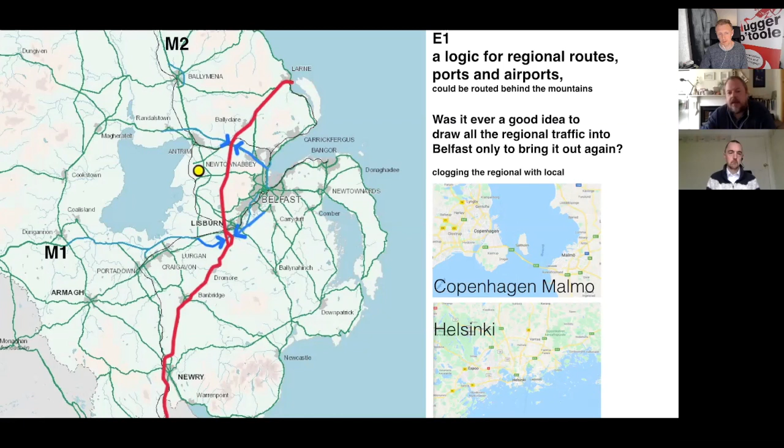The idea is that you could connect past Sandyknowes or even further up, you could connect the motorways from the M2 coming from the north in Ballymena and Randallstown down through the back of the mountains and take that traffic where it wants to go, to either the M1 or down the A1, Dublin and the ports in the south. So Belfast would be slightly bypassed, and this would actually bring it in line with the way that Helsinki and Malmo organise their very large road infrastructures on the edge of the city and away from people, but strategically connecting ports and airports.

So I suppose back in the 60s, they didn't realise that the airport might be so important as it became. And of course, airports now might not be so important anymore. But another strategic problem we've had in Belfast is because we had an airport that was a bit peripheral and wasn't very well connected, it laid the ground for Belfast City Airport to come up. So now we have two airports, and of course Dublin became a bigger airport. So we've divided our energies in Belfast between two airports, and I think that partly is connected to how we thought about the roads.

The other thing I'd point out about this diagram is that we could still do this. I'm not sure there's the appetite to build so many roads anymore, but we could do the Hill-Hall connection from the outer ring in the south and east. That would tend to draw some of the traffic better into Lisburn and the motorway network, paralleling the M1 as it comes out of South and West Belfast. And of course that road would take some of the traffic that wants to get from Larne and the M2 off down to Lisburn, so the M1 cross country wouldn't take it into Belfast.

So I think that would have been my ideal wider solution in the 60s, to say that we would connect into the port and city of Belfast with a series of feeder roads, and they wouldn't cut through the city so much as feed into it and disperse into it. That's how a lot of European cities worked, because they didn't want to demolish their whole city centre.

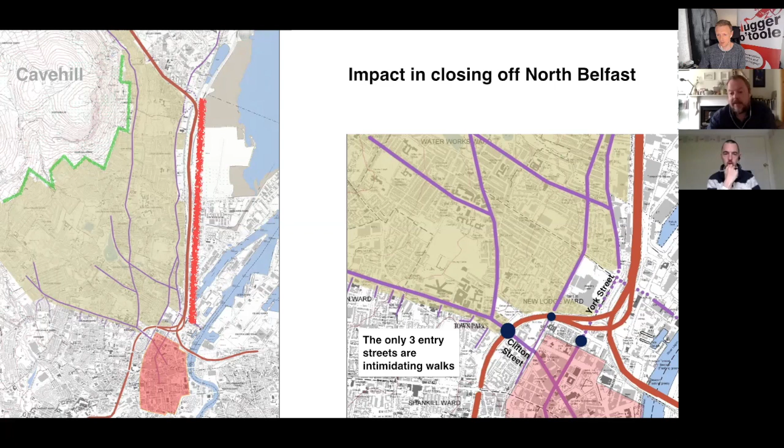If you're building a project this size, you need compensatory measures for the city, and especially for those residents. I don't think another country would be treating the people in that area as badly as they are anticipated to be treated. What's the population in those yellow areas, roughly?

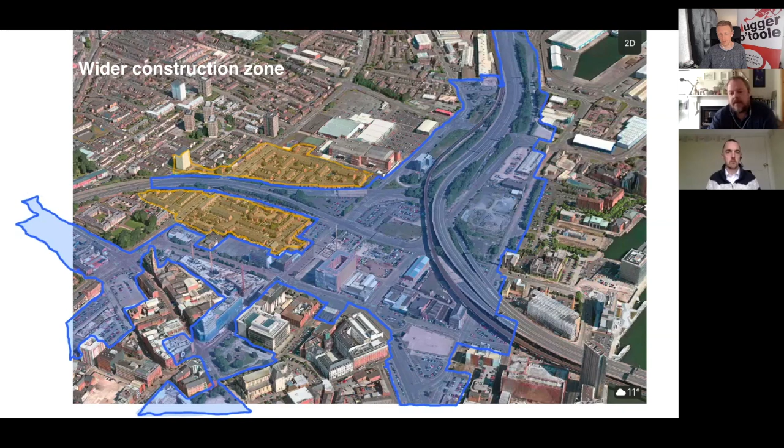So I've always taken the view that, again, we're just thinking about a road. So I want to solve the road problem, but I think I want to solve 10 or 20 other problems at the same time. That's the motorway with its perimeter and all the works. So the works extend well beyond the central part where the three motorways come together. There's kind of widening of roads, taking away of banks and trees that extends for hundreds and hundreds of metres away from the central part of the motorway.

And that's starting to have major impact on residents. So some of the motorway lanes have been widened into the buffer zones against people's back gardens and become very close, 10 metres away and 2 floors above houses. So I'm not getting into too much detail, but just to let you know, there's wide negative impacts for people in their everyday life. But moreover, for the city, you can see the scale of that.

And at the end of it, I don't believe it's possible - I've tried for 10 years - I don't believe it's possible to put back the urban environment and the pavements. It's too big a task.

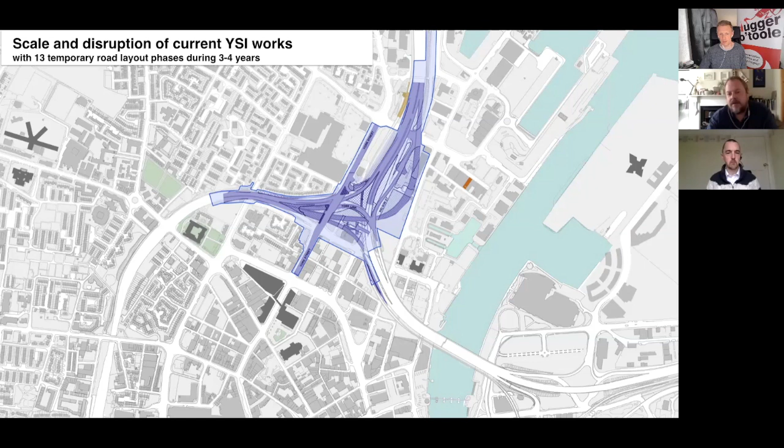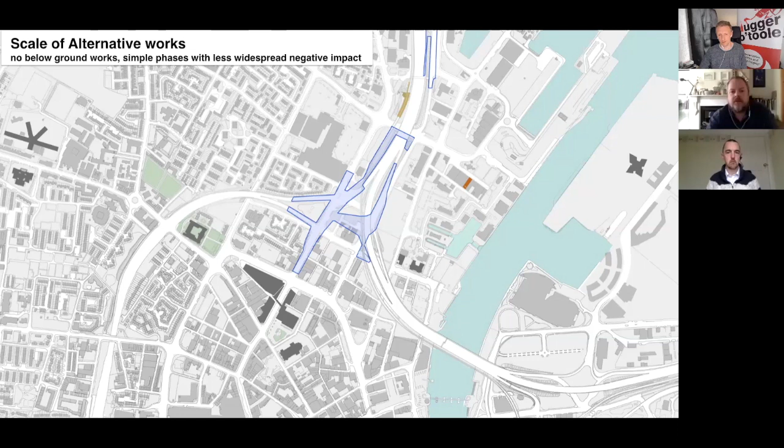It won't happen. So the alternative that we looked at last year, again, has looked at how can we solve that in a minimal area. So how can we get the maximum amount of connectivity for the minimal amount of disturbance and cost? And that's the methodology of this. It's not saying it's a perfect motorway. It's saying what is best for everybody - what is a value judgment about making infrastructure work for every user of the city and a wider interest.

I'm going to go through these quite quickly. This is the interchange that would take about 3 to 4 years to build and has 13 temporary phases. So I think people who are coming at this from a view of let's get this motorway built - I think it's important at this point to say the procurement and the start on site couldn't happen for, I think, 2 years. And it takes about 3 years to build.

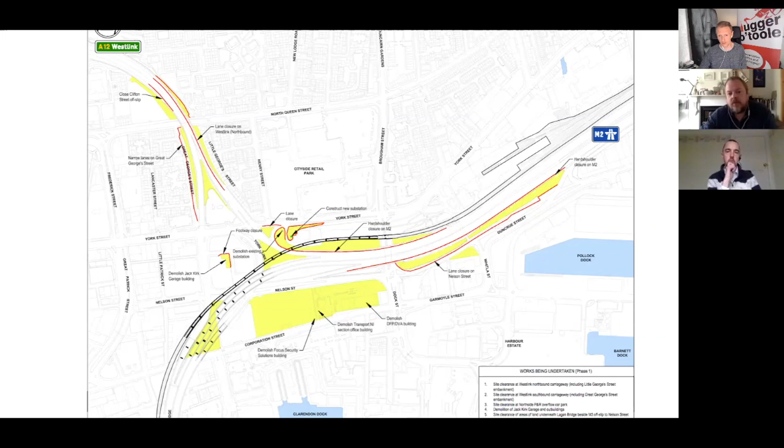So where we are now with COVID, we're talking to 2026. I think we all know that can extend very easily out to 2030. So we've got to think about, we're trying to build this thing in about 5 years' time. This is not a shovel-ready project. The project has to go into another year of design once it's procured.

So the preferred bidder then takes it for another 6 months to 9 months. And only then do we find out the final cost. Okay, so the project is not fully designed. So I'm going to flick through these quite quickly.

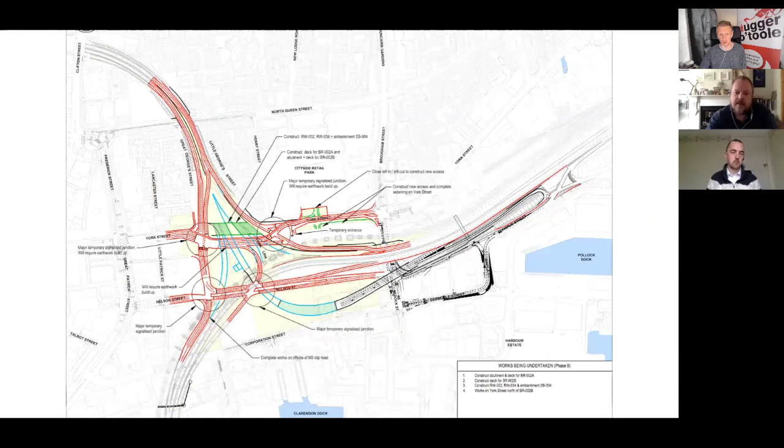And you see that during the works, the roads have to move around quite a bit. So these are all temporary phases of the motorway. So that probably would shock some people, and I'll have to let you sit for a while. It's interesting, anyone that has gone through that on their own and just flicks backwards and forwards starts to understand just how much pain there is going to be to build a road like that.

Yeah, it looks complicated, like super complicated. And there's 15,000 students 100 metres away. So in fact, never mind the residents of one or a few hundred people, we have new residents in the sense that there's 15,000 students being impacted by this as well.

So I want to take you through the alternative and explain the interchanges that's happening as well. So this is the problem on a view, and we're going to base all the slides on this view. So these are the main routes. You've got the M2 connecting to the Westlink through in the top of the picture in orange, and that comes down underneath the M3 and stops at a number of lights and then turns sharply onto a street called Great George's Street, where it merges with many other lanes of traffic and is about 6 or 8 lanes wide at that point.

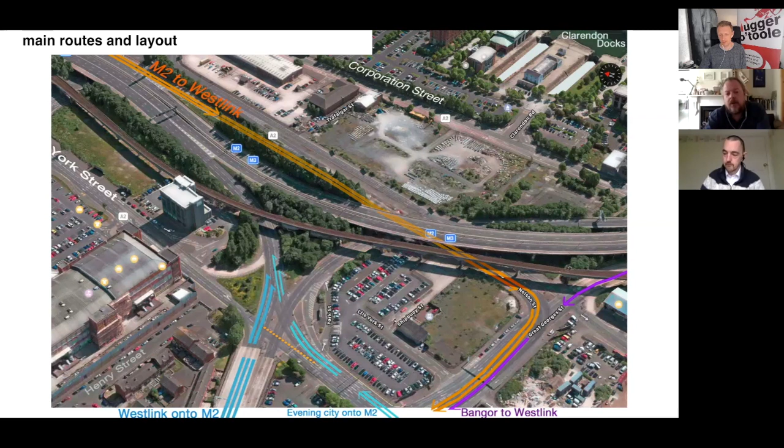And then it connects onto the Westlink. We have the traffic on the bottom coming from the Westlink in blue, and the city to the right-hand side. So we have traffic merging onto the M2, and they come in on those blue lines. And then we have other traffic coming across from the Bangor direction to the Westlink in magenta. So that's kind of the lay of the land.

One of the things that cuts through the middle of all this is the Westlink traffic through to Bangor. It's not to say that's the only problem, but it does cause half the stops and complicates solutions when you try to accommodate that link.

The starting point of this actually came out at the public inquiry, by another person objecting, who quite carefully and wisely pointed out that the quickest way to solve that problem is actually to use your existing infrastructure. So this design kind of depends on what we would call a hack, actually.

It's when you take your IKEA units and add a few new elements and make it look like twice the price. You're trying to take a very standard, low cost solution and make that the basis of your design. And this is it.

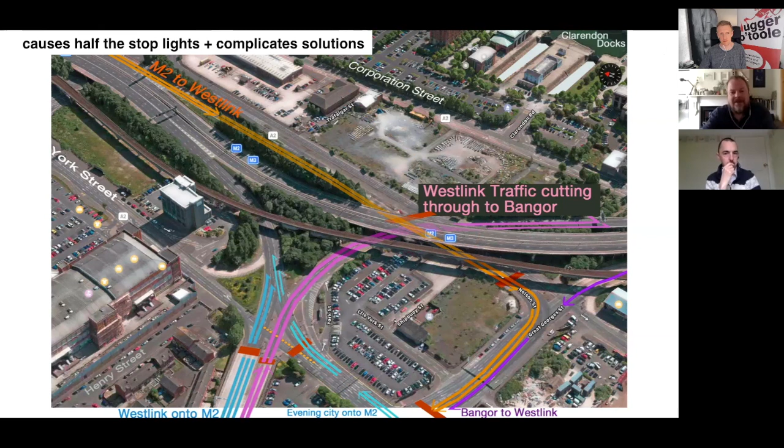We're going to come to that. The way the interchange proposes to deal with those problems is to build a new bridge from the M2. So they move the M2 to Westlink link onto a new bridge, and that goes at a very long, sweeping curve down 8 metres into the ground, which is about 5 metres below sea level.

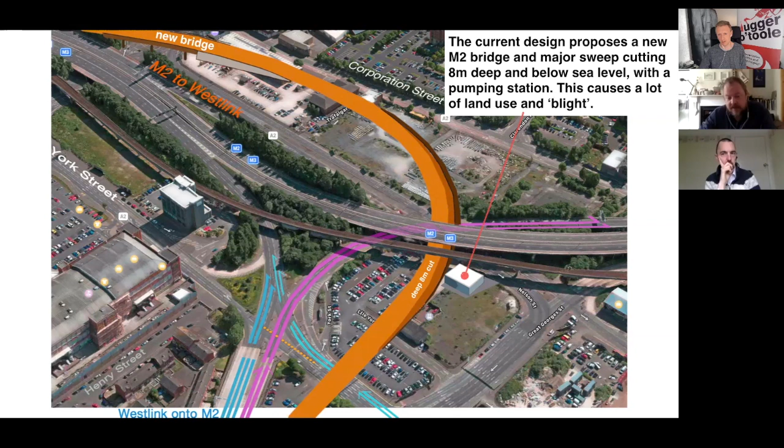That needs a pumping station. It also means all the services in Belfast, North Belfast, have to be moved around because of that.

And then it builds a very wide series of bridges. It's almost like an enormously wide concrete table, and that has to cut across 4 lanes that go below it. Those lanes that go below it are depressed 2 or 3 metres into the ground as well. And that means all the services in York Street have to be moved.

And then over the top of that bridge, you have 5 lanes, I think, of quite wide traffic, which means it'll be going quite fast, and 2 sets of lights. And on each side, you've got pedestrians and cycles.

One of the things I've always felt is that the design of this bridge is very heavy traffic dominated. It means the evening traffic has to go through 2 sets of lights to get out of the city, and that backs up into the Dunbar link and around the university.

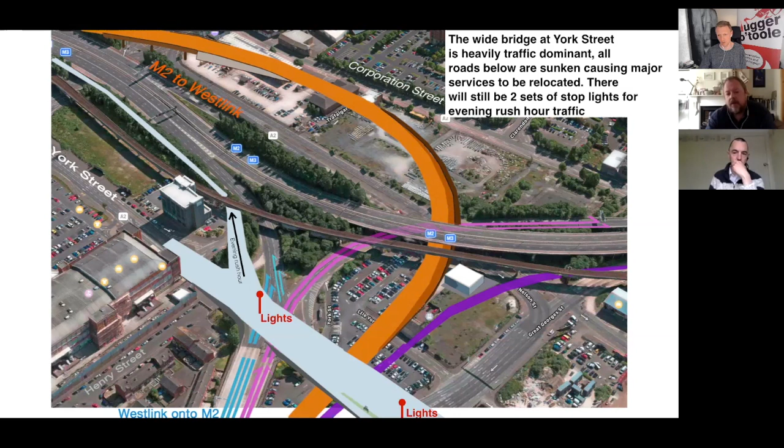So that's in essence. I think the important thing is this can't really be implemented until 2026. I know a lot of people watching this will be saying, let's get that road built, let's get investment in jobs. And I'm not disagreeing with that.

Let's get this road built, let's get it built faster, and let's get the same amount of jobs and investment, in fact more. So I'm very pro the idea that we solve this problem, but I think there are very high risks with this strategy. It could still face legal actions.

There are things like the decision at Heathrow, which has been challenged again, but the Heathrow decision really was saying that when you're making big infrastructure decisions, you've got to do a proper carbon audit, and say how it's going to meet the IPCC objectives we signed up to.

Now, when you say 'implemented', does that mean actually ready and finished, or just started? Okay, finished. So minimum, I think 6 years away.

So people, I understand drivers, hauliers and various interests in the city want to get this problem solved, want to get rid of these traffic lights. But as I went through on those slides, you've got to remember this is a difficult build, and it won't be finished for quite a long time.

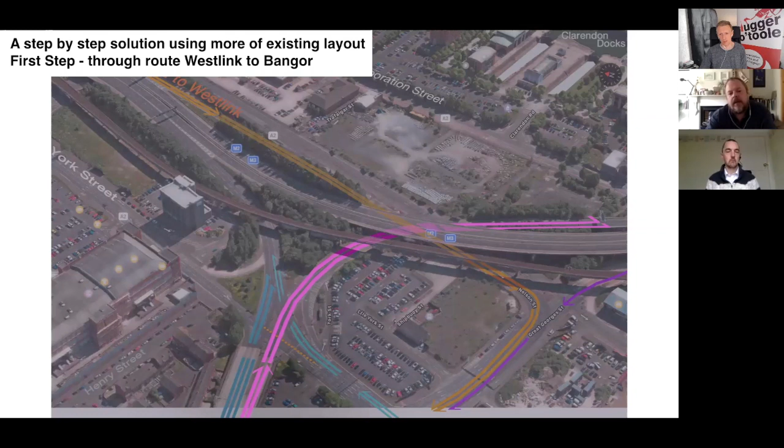Yeah, it looks like it. So to go back to the step-by-step solution, if we take that Bangor link and say, let's take it around an existing bridge in Dock Street, and that gets what's called grade separation.

It's a bit like, I always say, untying a knot in your shoelaces. If you can get that one out, suddenly the rest of the solution can fall into place and you can open your shoelaces a little bit.

So that's the analogy I use for the Dock Street Bridge. It can be improved for pedestrians, lit, and various things, but there's a bank there with a retaining wall at the back, and a new wall can be added so we can get essentially 2 lanes of traffic there, or 1 wide lane with a breakdown lane, through under that bridge. We can let it run essentially free flow or with minimal lights, and connect it back up through Nelson Street and up the existing slipway to Bangor. So that's about trying to get that traffic flowing.

And then as part of that, I would take the local traffic around that same loop. This is land behind the train line. So the other thing to look at is that little route behind the train line and that connection at Dock Street, which could be built as a first phase almost without anyone knowing it was happening. You could have a series of crews working away there—I don't think anybody in the city would know it was being done until it was ready to open. So it's very low impact. But you're taking the local traffic out up at York Street Station, and you don't let it go down York Street. The reasons for that become clear later.

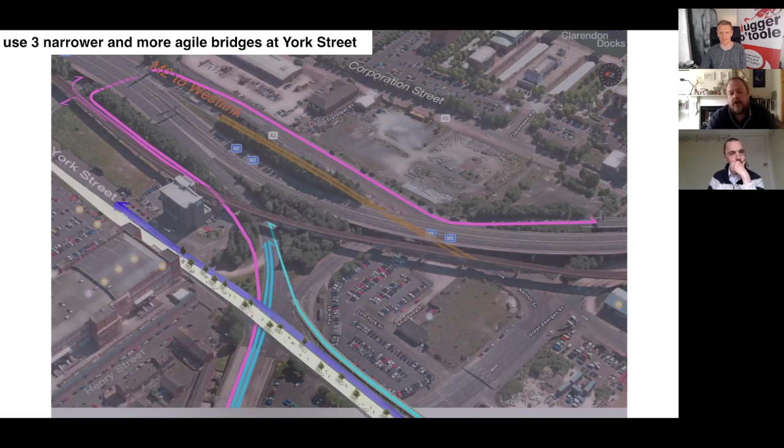So zooming into that, that's an example of the sort of walkway. There could be a major symbol, essentially of a new university connecting to York Street train station, and a major symbol of North Belfast renewal would be to create a wide cycle and pedestrian link.

And the trees are just planted where the columns are, so there's no heavy engineering involved. So that's that, and as you zoom in, that's how I would do it. I would gather all the pavements and cycling into one sort of super wide connector at York Street. That really connects where most people are, in the university, to where most people want to go, which is city side on that side of the street, and then on up to the station and into York Road.

And the other link would be the direct link onto the motorway, with no traffic lights from the university point. So just to be clear, the reason why you have this kind of elevated York Street is that it allows the traffic from the Westlink, etc., free movement, whereas currently it's stopping at the lights—yeah, York Street, is that basically the idea?

Yeah. So this idea is essentially the same as the current interchange—it is to build an overpass, as it's called. But I would suggest that because the roads below are on grade level, I don't think they're worth sinking. I think we just build this bridge with a thinner structure. Because it has to span much less, it can be designed much simpler. And the road on the right, the slip road, only has to go over one section of road. So we're bringing the evening traffic directly onto the M2 rather than over it and then connecting it on.

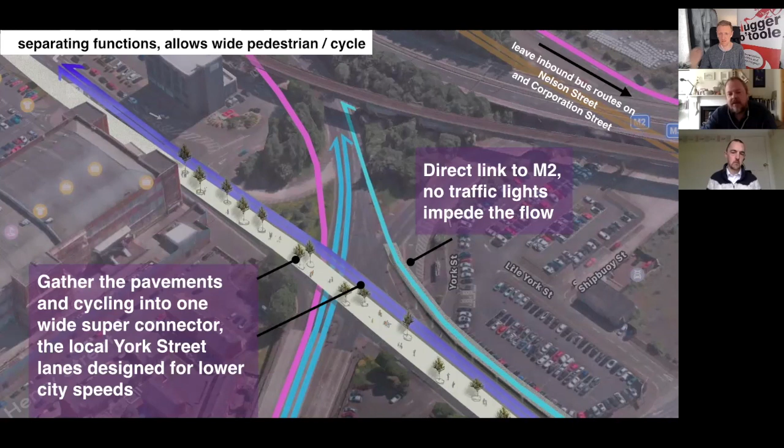So this is a kind of technical detail we'll probably not get into, but this is trying to solve it in the simplest way. And then finally, rather than building the big sweeping curve in the new bridge, I would say we've lived 40 years with this solution as it is, ad hoc.

I think again this idea of how do we solve the brief in the simplest, fastest, cheapest way possible. Not about how do we design a perfect motorway.

So we take the traffic off at the M2 Westlink, we put it into a 30 mile an hour zone, and we put a gentle curve, gentler than shown there, and we realign those roads away from Great George Street and up onto new roads. So we get a new curve there, we take the traffic light out, and that curve can be designed for around 30 miles an hour.

And that means that we go into a kind of forced speed control. So everybody coming up the M2, getting through the Westlink in peak time, can't drive more than 30 miles an hour, but I would be surprised if the Westlink is going at 30 miles an hour.

So we have to, in my view, base our solutions on utter pragmatism rather than getting caught up and letting what I would call the tail wag the dog. We can't let the regulations wag the whole dog.

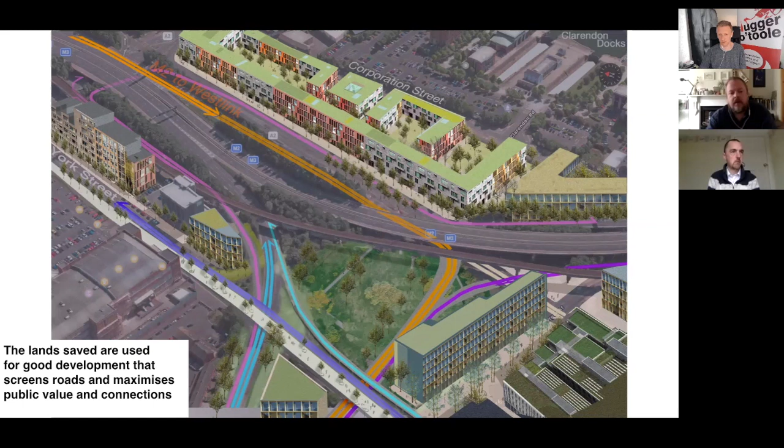And it means that public land is not being wasted and can be put into a land trust and developed over time in a good way.

And it means that we get, and this for me is the real win then for Belfast, solving the road problem now. There are on-off compromises that are happening in that - some of them are better, some of them are denied. But this becomes a kind of infrastructure for all.

So it does mean that we can say cycling and walking and the regeneration of streets and the regeneration of connections from North Belfast, that has been cut off from the whole city for 50 years - that fifth of the population of the major city has a right. It has a right to connect through this area, and that right can't be denied.

So to make safe and good walking connections, all those yellow routes, all those orange and yellow connections are reimagined as walking routes that can be designed well, can have buildings, trees, landscape, and essentially make a net and connection.

And from an urban design point of view, we know that the best cities are always ones with grids. So it's not about getting from A to B in one road or one street. We all know that where you can take 4 or 5 streets to connect from your university to your docks, those 4 or 5 streets will give you lots of choice. It means you can have more people and businesses living there, and deepens the connection. So in urban design terms, we always like gridded cities and cities that have multiple routes.

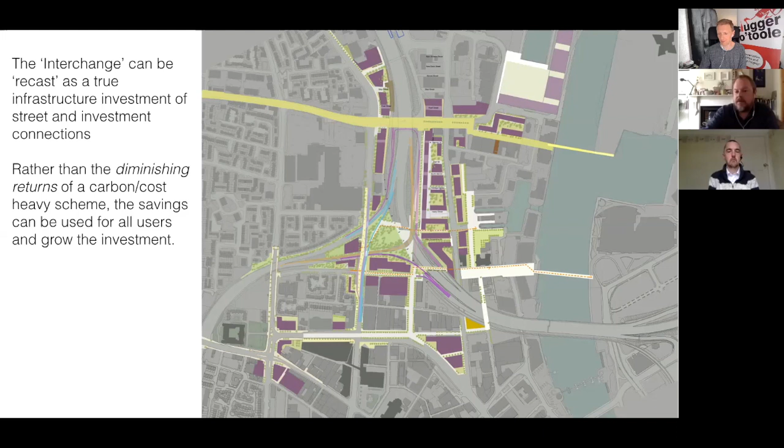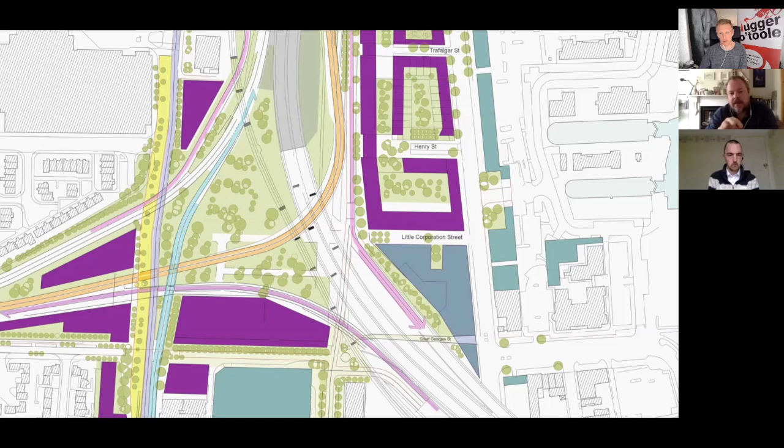So as you move into the kind of urban design, the purple areas are all new buildings. We can put back streets, we can have connections, and interlaced into that is the solution of the interchange. This is a drawing at a slightly bigger scale, so we're actually drawing this in computer programs, checking the radii and the elevations and so on, trying to show this can be solved in physical terms.

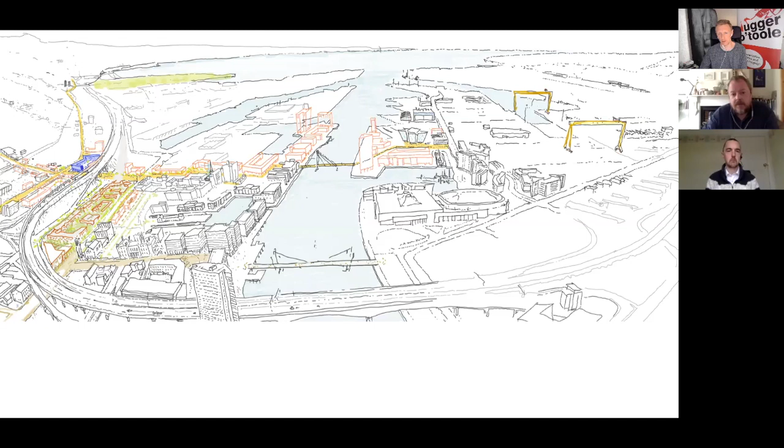And there's a view of what that part of the city could be like as the docks slowly change into a kind of new regeneration. It seems obvious to me that a large part of the docks might connect further up the motorway at Fort William - they have other routes out. And this part of the city is more ripe for development in the longer term. This is the model we made in 2012 with 25 students, having a go - it was a different design, but having a go at how to do housing and mixed use through that area.

Have you ever tried to have your kind of alternative proposal costed, or got a rough idea of how it compares? I think we have a pretty good idea that it's probably a third of the price very easily, because we're not proposing to go into the ground at all, really.

Of course, there may be services that need moved, but we don't need to build a pumping station, we don't need to worry so much about flooding. In fact, the roads could be carefully designed to act as a flood barrier for much of the city, so you could get two things out of that. And you can see on some of the earlier slides that the impact is we accept more of the existing infrastructure we've got, so we're spending a lot less on widening the motorway hundreds of meters away from the interchange.

And I think finally I'd make the point, this is about getting traffic through Belfast at peak hour. It's not about calculating, can I drive one minute faster through Belfast? It's about when the rush hour is on, how can we get the maximum amount of traffic through in the minimum time. If you think of a big slinky spring, the way traffic works when it's in crowd mode, slower even-speed traffic is what gets most traffic through. It's when people start speeding and braking and stopping, weaving and stuff - that's what slows the traffic down and causes big traffic jams. So you want to just get people through without the lights, doing it in a pragmatic way.

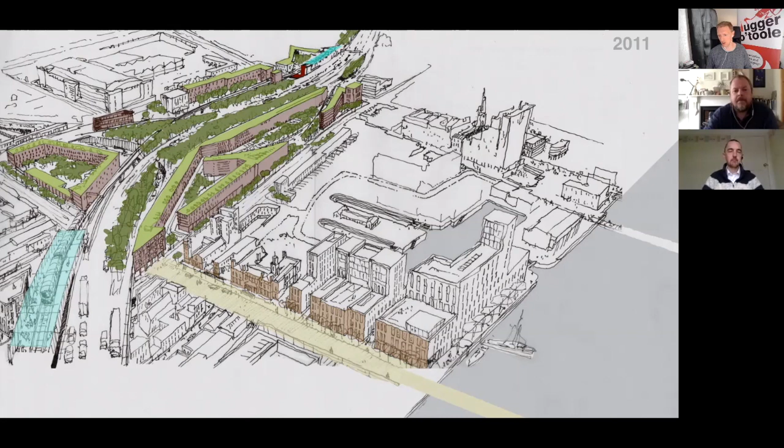Thank you, Mark. Very, very interesting, and there's a lot to say on that. If I start at the highest level, Mark correctly pointed out that the Belfast motorway network serves two functions, and that's because of its origins in the 1960s, where it was envisaged unapologetically as a commuter route for getting into the city centre, which means Westlink is festooned with local junctions. So you can get on and off this motorway network in a lot of places, and that's sort of its Achilles heel, because nowadays the role of the motorway network really is for strategic long distance traffic heading to Dublin or up to Derry or the ports, and this strategic traffic is what we're trying to facilitate.

But the problem is that these junctions, especially the York Street ones, also have lots of local traffic and commuters trying to get to the local streets, and it's very difficult with what we've already got to try and separate those out. You can't really separate the strategic traffic from the local traffic anymore, just because of the legacy of what's been built - that's what makes it difficult. So you can improve strategic movements, but at the same time you'll also facilitate more of what we don't really want to facilitate right now, which is encouraging people to drive their cars into the city centre.

So in terms of the design of this junction, the design that is proposed here, that's the current plan, is essentially a design that is built to urban motorway standard. The idea is to maximise the vehicle throughput. That's really the design brief, to get as many vehicles through the junction as possible.

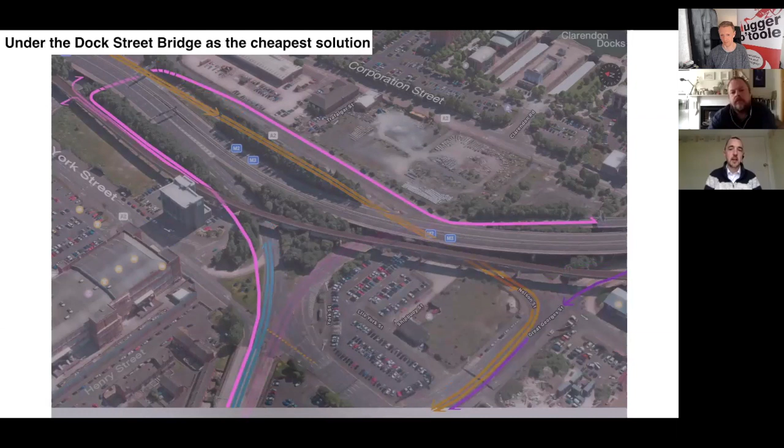So the long sweep out towards Corporation Street, the one with the 8 metre wide orange line, is designed to get vehicles round onto the Westlink at a design speed of perhaps 40 miles an hour, and that's why it's needed. It's also a lot wider than it needs to be, because you need a long forward sight line when you're going around a curve.

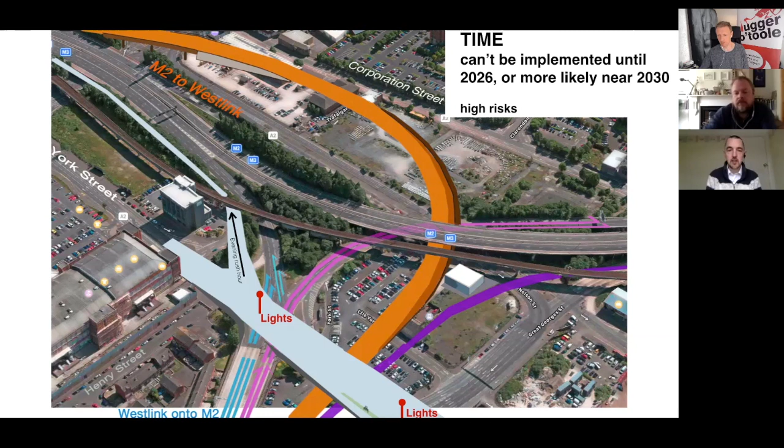Everything else then is built on top of this requirement. So Mark's right to say that the movement of vehicles has been the number one consideration in the design of this junction. So in terms of whether it is feasible, in engineering terms, it's feasible. It's complicated, but it's feasible.

Now, whether that design is appropriate, I think, is a wider question for society, and I think that's a valid point in this location, because we're a mile from the City Hall here, and I think it is right that we ask the question whether we want a road of this type, and it's right that society asks that question. So it's not purely a matter of what is needed to facilitate vehicles. I think it's right to question that.

I'll go out on a limb and say I don't think that the junction in the design that is proposed is going to happen, and two reasons for that. One is, I think the design of the junction, which has been in place now for 14 years, by the time we come around to designing it, I think it's going to be the type of design that society would reject. I also think that with the ruling on Heathrow Airport, the design of the junction as it stands is highly susceptible to a legal challenge, which would delay it.

And with COVID-19, I think there's a question mark over whether we will have the money to build this. We don't have the money now because it was DUP Tory pact money, and it's not clear to me whether that money still exists. Even if we do have that money, it's going to be quite a few years before it hits the ground. I think Mark mentioned 2026 for completion as an earliest possible date, which I think would be optimistic given the fact that legal challenges can delay things by several years. So I'm not convinced that it's going to happen in the form proposed.

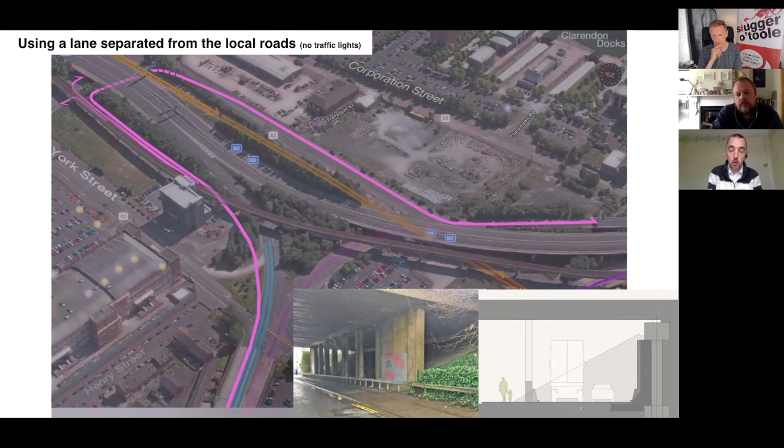The design does hinge a little bit on reducing local access to and from the road network here in some places. I'd particularly note - I think Mark and I talked about this before - how you would access Belfast Port from the road network here. It's not clear to me exactly how you would access Belfast Port from the Westlink, for example. Mark, maybe you want to explain what you said about that?

Well, I suppose you could come off behind the train line there, and access it at a local junction at the very top left, so you could get into the port that way from the Westlink. And then getting out, I think I prefer, and the local community would prefer, that a lot of that traffic was geared up towards a further section. There's a piece of work going on up at Whitla Street and further up at the Fort William roundabout, so there are ways they can get out that way.

But given what you're saying about weaving - not technically, but it is physically possible to come on at Nelson Street and still get onto the M2 Westlink and go off south from the port. But I think the amount of weaving going on there would probably need lights to allow that to happen.

So at the minute you can come around that corner, just where the word M2 is, M2 to Westlink - at that point you can come along and get onto the Westlink connection, weaving across. Some people will know that link exists. And that was also taken out during the York Street scheme.

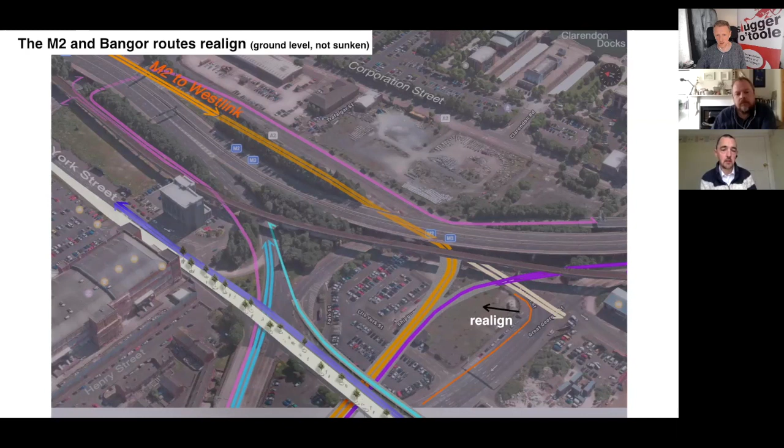On the whole, though, I like Mark's design. I was a fan of the FAB plan for what you would do with the existing plan, which was the hand-drawn diagram that you showed at the very end of your presentation. Yeah, this model as well - that one, I was a big fan of that. I thought that was basically the junction as proposed, but with a lot more built environment around it. And I think that's a very, very good plan.

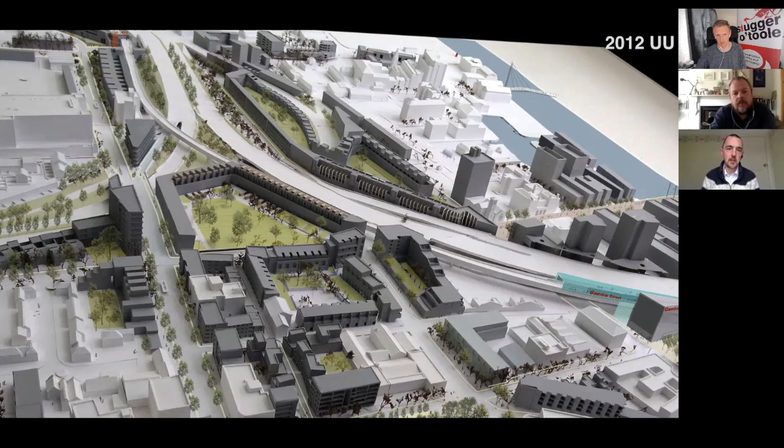My view on this is I think the road network is important, and I think something needs to be done about this junction. But at the same time, this is a mile from City Hall. It's a very, very sensitive area, and it has been decimated by the road network - there's no doubt about it. And I think this is one location where I think it is right to take a wider perspective and see this as a built environment project and not purely a roads project.

So I think what Mark's doing here is good. I think it's well worth looking at. And I think with the situation with money and COVID, I think we are going to have to look at solutions like this. The solution would be easy to implement - there's no doubt about it.

I'm just trying to think, if I was Nicola Mallon, who's also a representative of North Belfast, which obviously is going to be a factor, I would be thinking, is it better to have something that gets you most of what you want, but you can get it done cheaper and quicker, without all the legal challenges and cost? So from a political point of view, Mark's proposal kind of makes sense in that it's more realistic. Because if it gets you more or less what you're after, is it not the best way of going for it?

That's right. This is one location where nobody will get everything they want. The current design, nobody gets what they want from it. The proposed design, nobody gets everything they want from it. Mark's design, I think, is a good compromise, to be honest. Yes, and I think it's worth considering.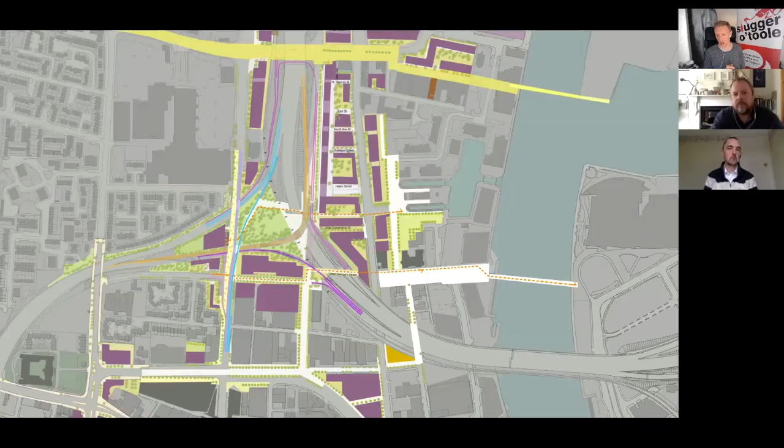I think, because we're running out of time, we'll finish up quickly. I was going to ask your views on where we stand in our post-COVID-19 world. There's a lot of people working from home now, and it's unrealistic to think we're just going to sit in our houses forever. Obviously we'll come back to the offices at some stage, but there's going to be more hybrid work, with people working a day or two from home a week. For example, if more people work from home on Friday, we could get rid of our horrendous Friday traffic problems. So do you have any views on how that's going to influence the road network and road design going forward?

The capacity of the road network is very sensitive. We have a traffic management system in Belfast, and it doesn't take that much of a reduction in traffic to significantly clear things up. We've seen that over the last few weeks. Traffic levels are sitting at maybe 50% during rush hour of what they normally were, and they've been very, very clear.

We don't know what's going to happen in the future, but if people are going to be working differently, commuting at different times, commuting less often, then you could have a situation where it turns into the summer holidays all the time on the road network. If that's the case, given that we are stewards of public money when building roads, I think it would make sense to stop and reconsider what we're building. Even if we decide to continue with what we're doing, I think it would be wise to pause for a second and see what's happening.

There are two possible outcomes. One is that there might be some schemes we decide are no longer necessary. On the other side, there are some schemes which would have just filled up with cars again after a few years that might actually be more feasible because they wouldn't fill up with cars again after such a long time. So it could go either way - some schemes could benefit from lower traffic since it makes them more sensible, while others become redundant and don't happen at all. I certainly think in the next year we need to sit and take a look at this.